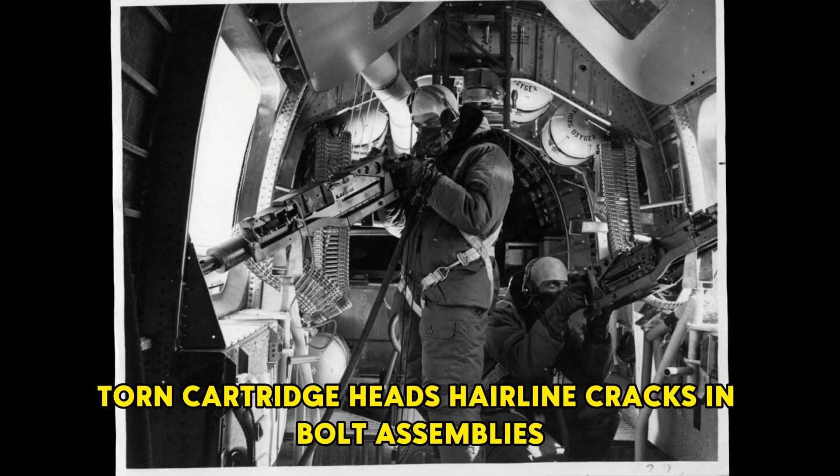Numerous technicians reported similar types of damage: torn cartridge heads, hairline cracks in bolt assemblies, or firing pins striking off-center. One maintenance group noted, "Every 10th barrel change ends with a dead gun." In other words, 1 in 10 guns became permanently silent after barrel replacement.

In the humid climate, with persistent rain and fine sand seeping into every joint of steel, readjusting the headspace, the distance between the bolt face and cartridge case, became torture.

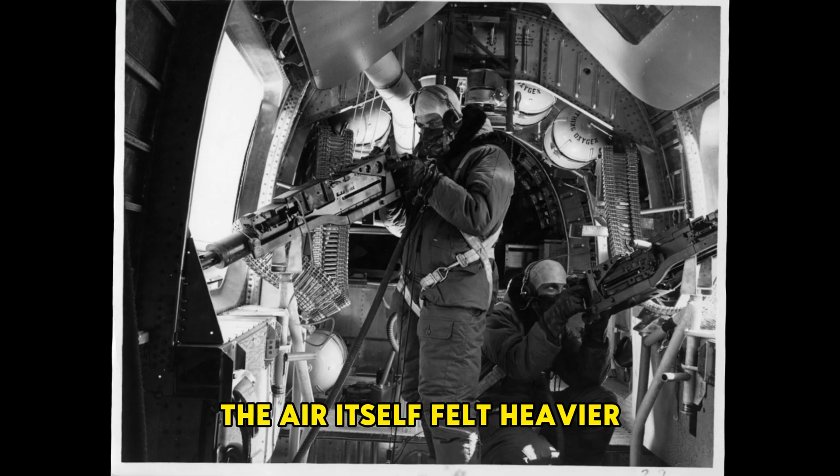A pilot from the 475th Fighter Group recalled years later in an interview with the Smithsonian, "It wasn't fear of the enemy, it was the fear of silence. When you pulled the trigger and nothing happened, the air itself felt heavier." That statement captured precisely what hundreds of men felt as they flew home, powered only by engines and luck.

In a documentary screened in Washington in 1946, the room fell silent as footage showed a P-38 landing with 6 blackened Browning barrels, faint smoke still rising from the seams. The projector hummed softly, and the narrator's voice droned evenly: "They fought with weapons that could not be trusted."

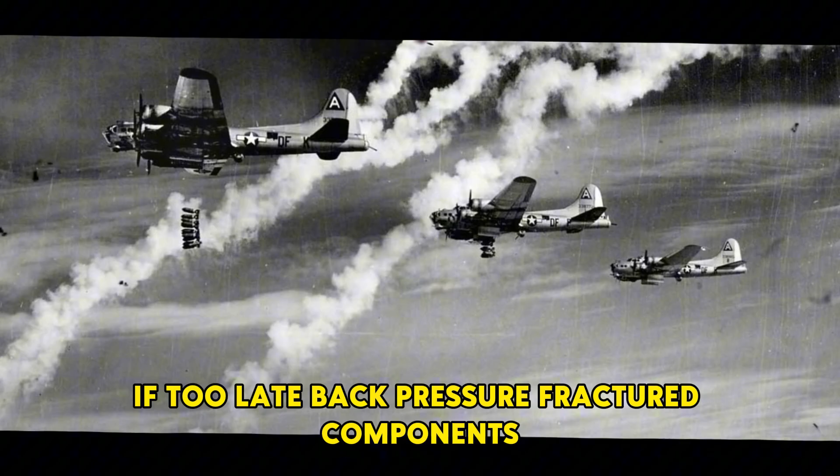According to the USAAF Ordnance Maintenance Review, Pacific Theater 1942, analysis traced the cause to misalignment in headspace and timing, 2 parameters governing the firing cycle. The bolt had to close completely, and the firing pin had to strike the primer within thousandths of a second. If too early, the cartridge exploded before the chamber locked. If too late, back pressure fractured components and halted the next feed.

Units were issued go and no-go gauges for manual adjustment, but the process required a flat surface, stable lighting, and proper tools. In the field, with aircraft still hot from sorties, technicians had to rely on touch. A deviation of less than 0.01 inch could render a gun useless.

In his December 1942 report, Lieutenant Colonel W.H. Morgan of the Army Air Forces wrote, "Field armorers are performing miracles with tools designed for benches, not foxholes." The note was archived as a desperate warning in technical files.

According to Air Force Ordnance Command statistics, the average Browning in the South Pacific reached only 840 rounds before its first jam, lower than training standards.

Some units, in desperation, improvised fixes: regrinding bolts, replacing springs, even shortening firing pins with hacksaws. These methods sometimes saved the next mission but more often destroyed the mechanism after a few hundred rounds. A note in the 11th Fighter Squadron diary read, "We spent more time fixing the guns than flying the planes."

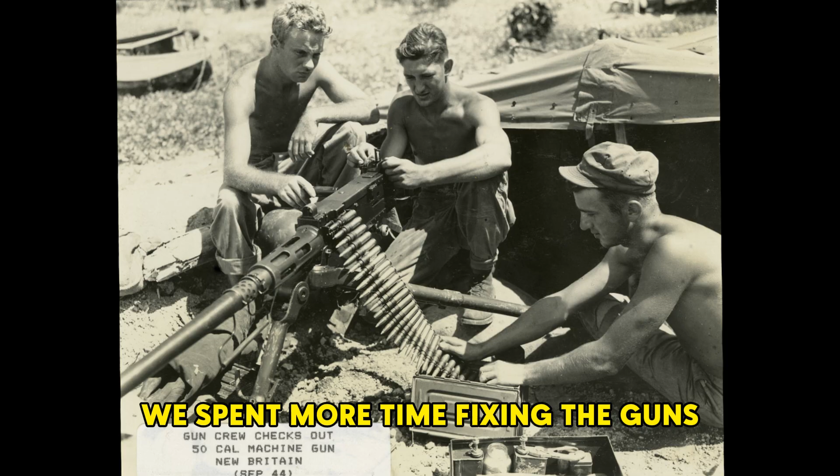To field commanders, the problem was not only technical but moral. The weapon advertised as America's deadliest aerial weapon had become the object of doubt among its own users.

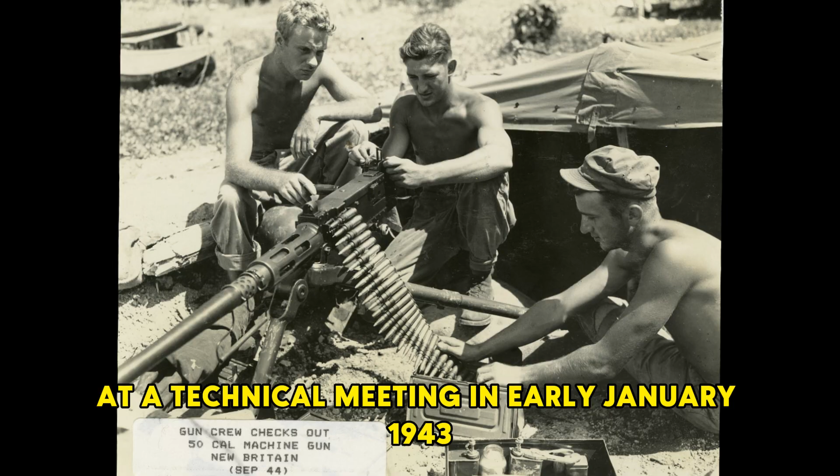At a technical meeting in early January 1943, a young officer spoke in a strained voice: "Sir, it's not the Japanese I fear, it's the trigger." The room fell silent. Everyone understood that in the skies, where a single pull of the trigger decided life or death, the silence of the gun was more terrifying than enemy fire.

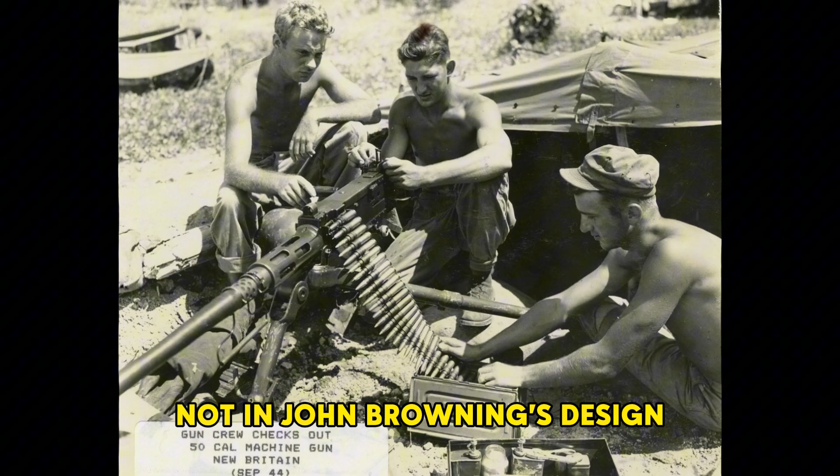According to AAF Technical Memorandum No. 42-117, the conclusion was that the fault lay not in John Browning's design, but in manufacturing precision and maintenance procedure. The system required manual recalibration after every barrel change, but battlefield conditions—vibration, mud, heat, and pressure—made proper adjustment nearly impossible. The mechanism was too delicate to withstand the reality of modern warfare.

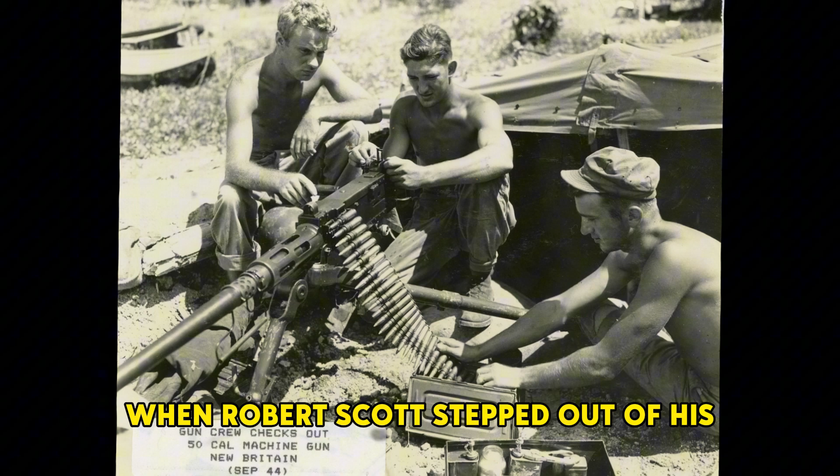When Robert Scott stepped out of his bullet-riddled aircraft that day, he did not know that his incident would become a textbook example in U.S. Air Force technical archives. A photograph captured the moment he stood beside his scorched P-40, gloves still clenched, later reprinted in the following year's report with a terse caption: "Pilot survived. Guns failed." The report's final line contained only four words: headspace and timing errors.

And in the silence of that meeting, no one imagined that just a year later, an engineer at Springfield Armory would change the weapon's fate forever.

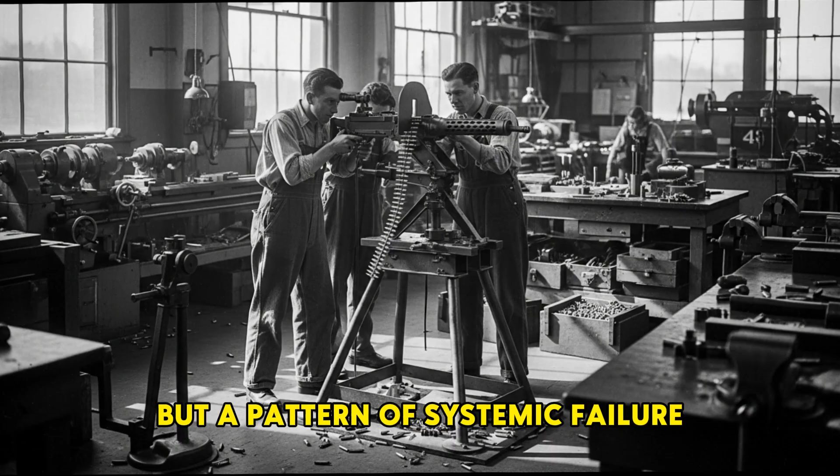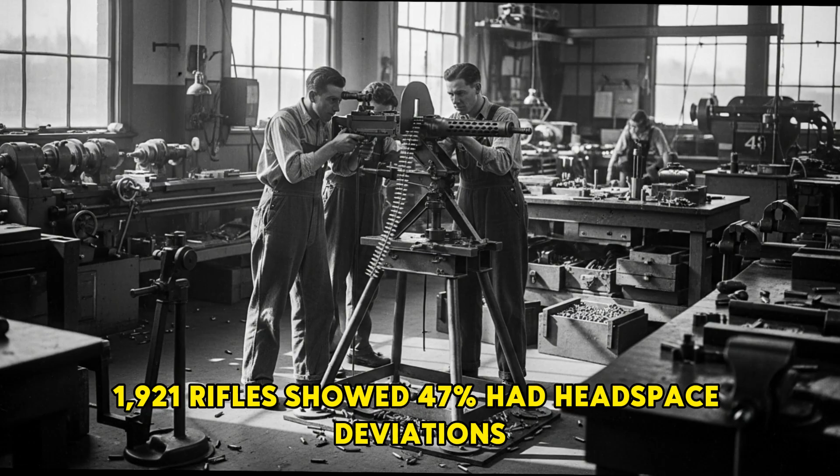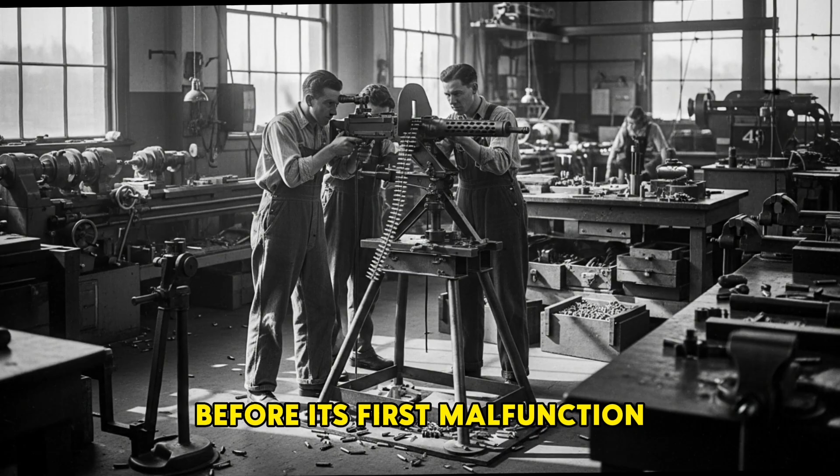Beginning with the numbers, the engineering story that emerges is not a series of isolated faults but a pattern of systemic failure. The 1925 survey of 500 M1921 rifles showed 47% had headspace deviations, 61% had timing errors. On average, each gun functioned for only 840 rounds before its first malfunction, and in 23% of cases, after a barrel change, the weapon could not be fired. These figures are set out plainly in the report and demonstrate that manual adjustment methods were wholly powerless under battlefield conditions. Reading those figures, one must immediately grasp the nature of the problem.

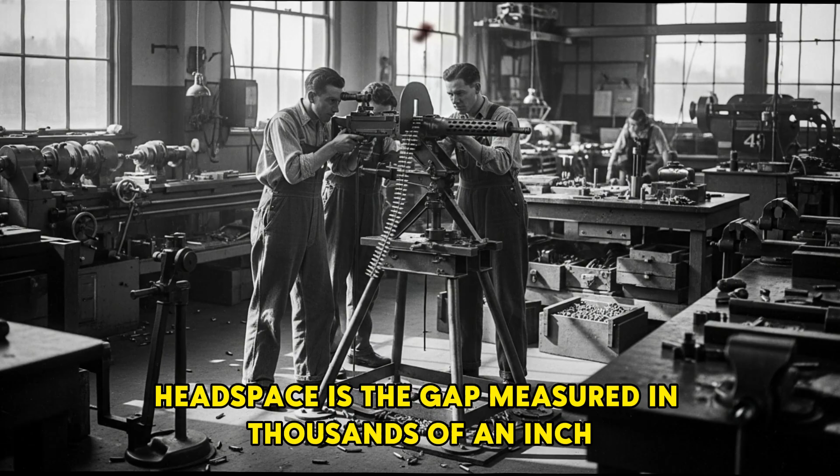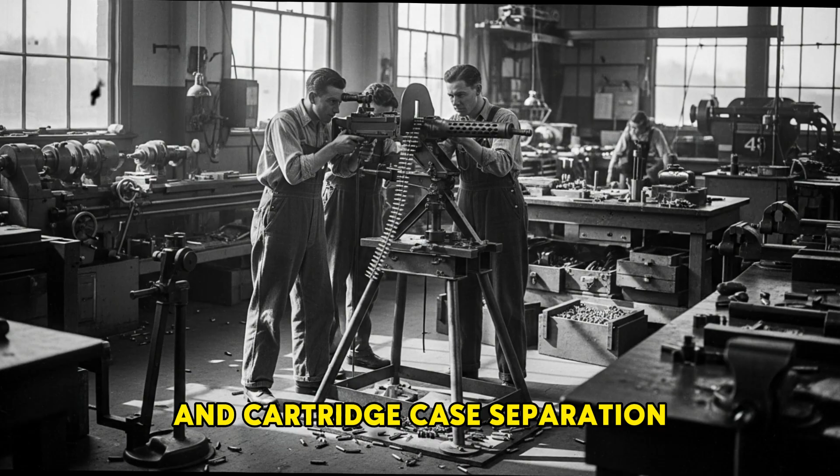Headspace is the gap, measured in thousandths of an inch, between the cartridge rim and the breech face. Timing is the instant the firing pin strikes the cartridge when the bolt is fully locked. Three failure modes repeat across every report: premature cartridge detonation before the bolt is locked, late strikes causing unstable pressure, and cartridge case separation leading to mechanism jams. Each mode arises from mechanical tolerances so small they are invisible to the naked eye.

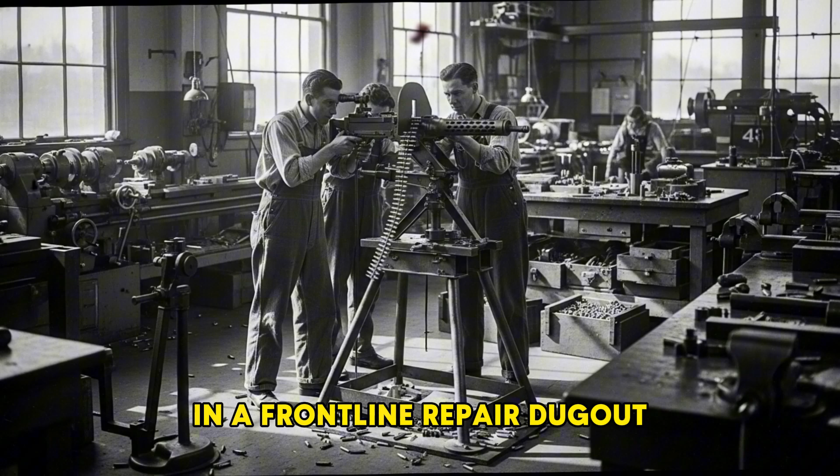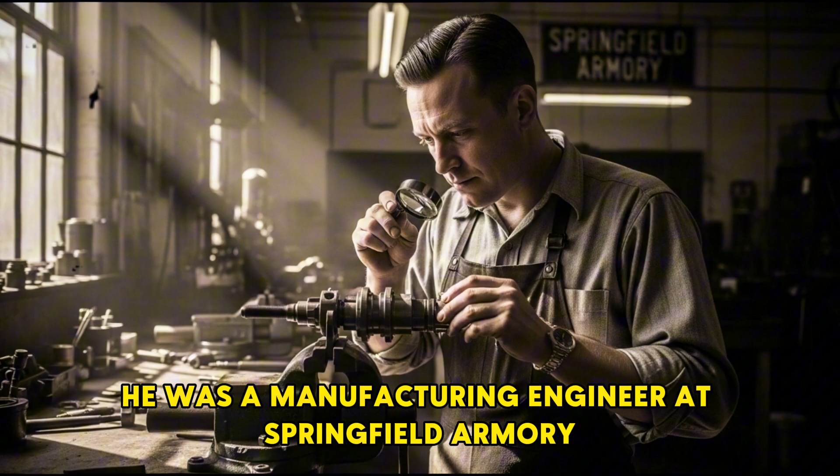In workshop conditions, these errors can be corrected. In a frontline repair dugout, with poor light, tired hands, and sand ingress, there is no way to guarantee workshop-level results. Into that picture steps a man who calmly said, "Precision eliminates adjustment," a phrase not a fashionable slogan, but the thesis of an engineer named Samuel Green. He was a manufacturing engineer at Springfield Armory who saw the difference between a beautiful drawing and a weapon that would survive in the sky.

Green did not argue about the power of individual cartridges. He foregrounded the process: if each part were machined to sufficiently tight tolerances, there would be no reason to rely on the skill of a craftsman under adverse conditions. This notion shifted responsibility from the front lines to the factory, and it directly challenged prevailing production habits.

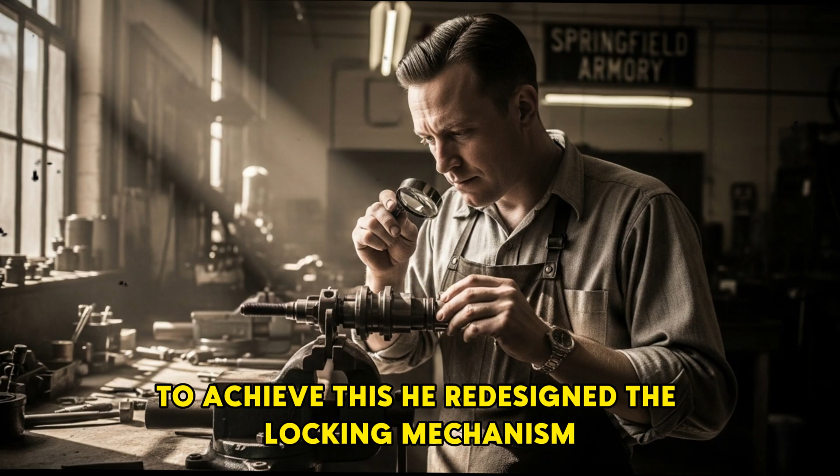His solution was not a novel shape, but a rethinking of the process. Rather than accept that headspace and timing must be adjusted after every barrel change, Green demanded that the factory fix those parameters at the source by machining each component to tolerances about 10 times tighter than the then standard, reaching plus or minus 0.001 inch. To achieve this, he redesigned the locking mechanism, altered machining methods and the inspection regime, and required every critical part to be measured, compared, and test-fitted individually before leaving the plant.

The idea sounds simple, but realizing it required upgrading machinery, inspection procedures, and a will to invest. Some members of the board initially scoffed that producing to such tolerances was impractical. A few contractors said costs would double, and many experts argued it would be difficult to ensure mass-produced parts met the same standard. Green answered with a decisive plan.

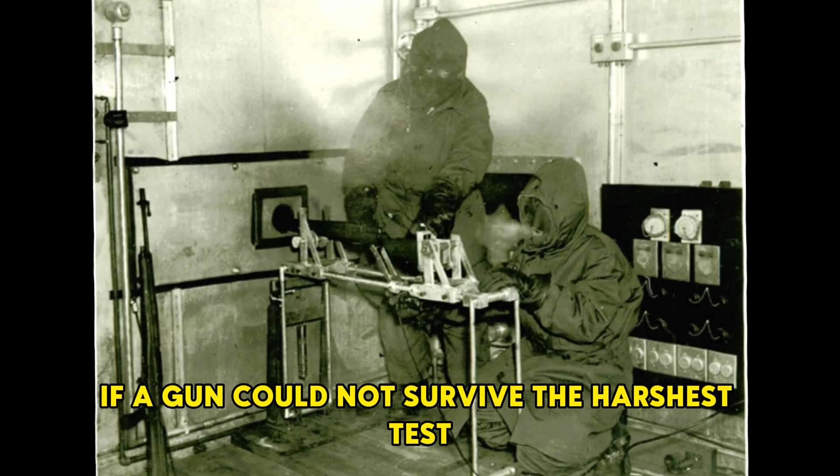If a gun could not survive the harshest test, it did not deserve to go to the soldier. That was the origin of the test later called the suicidal proof.

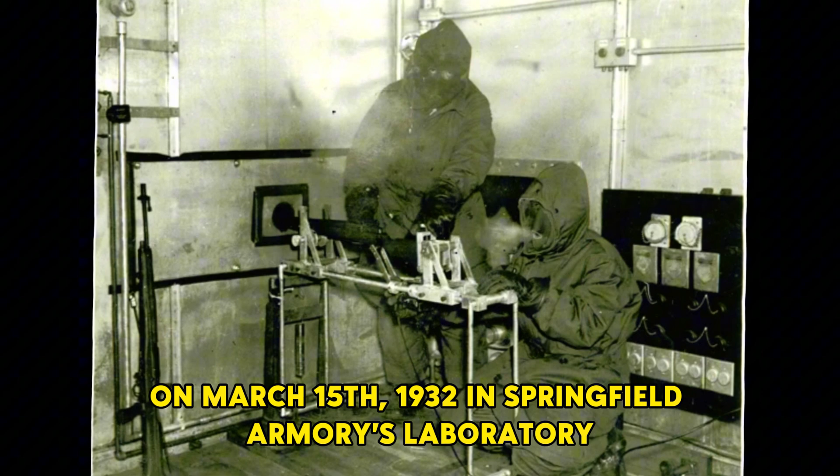On the 15th of March 1932, in Springfield Armory's laboratory, Green loaded the gun with proof cartridges whose propellant had been increased by 30%, producing chamber pressures up to 70,000 pounds per square inch. Each round could blow apart the receiver if a small deviation existed. The danger zone extended to about 20 feet, which is why many called the test reckless.

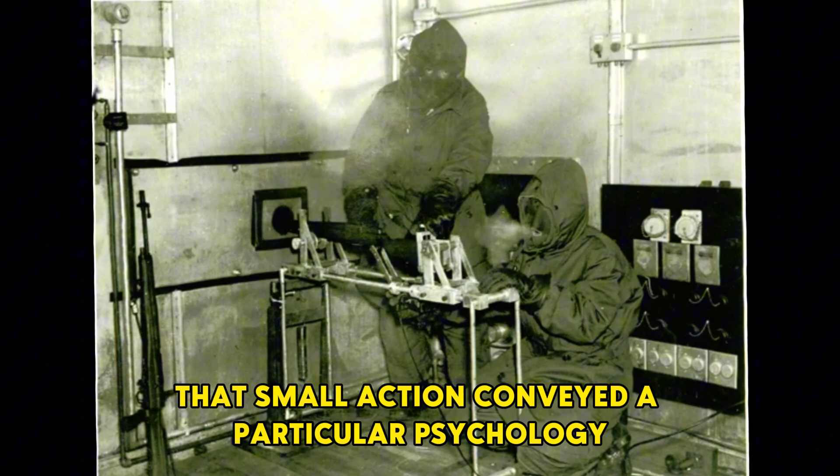He fired 10 proof rounds in succession. The blasts, dust, and fragments followed each shot, and after each one he checked with gauges, removed the bolt, inspected the locking lugs, placed his finger on the metal edge, and felt for heat. That small action conveyed a particular psychology - he was verifying that the machining calculations had held in practice.

The testing did not stop there, because a prototype that survived 10 proof rounds did not prove durability under combat conditions. Green put 6 prototypes into a never-ending stress test cycle, loading them with a total of 50,000 rounds, changing barrels every 5,000 rounds, firing a proof round after every 500 rounds, soaking samples in salt water, coating them with mud, then firing, freezing and thawing to test reactions.

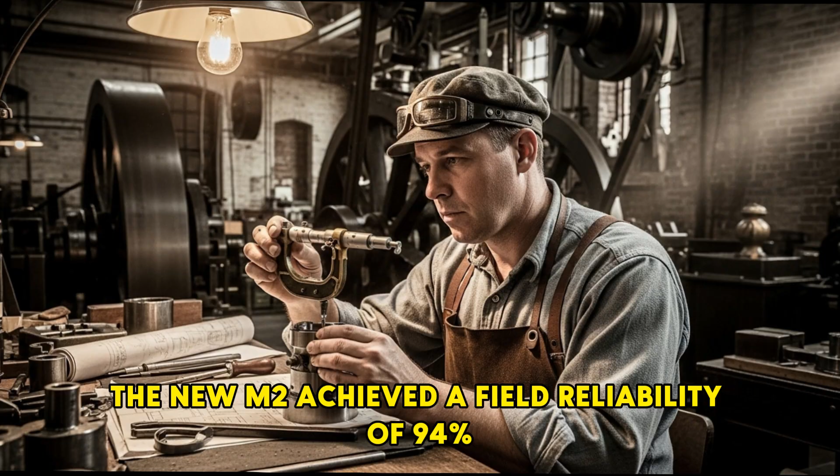Every scenario was simulated. The data were recorded meticulously, inspection results bagged by day, and when the tests concluded, the figure Green presented to the board was clear: the new M2 achieved a field reliability of 94%, compared with the 68% recorded for the M1921.

Measurement tables, notes in black ink, and snippets of recorded commentary from the test assistant after each shift all combined to form irrefutable evidence. But numbers alone were not enough to persuade decision-makers, for cost and scalability remained questions.

Green understood this. He provided the full production documentation, detailing each machining step, and a list of contractors capable of upgrading their equipment. He visited workshops, stood beside machinists, placed his hand on the lathes, sometimes examining a blank with closed eyes, as if testing a musical note.

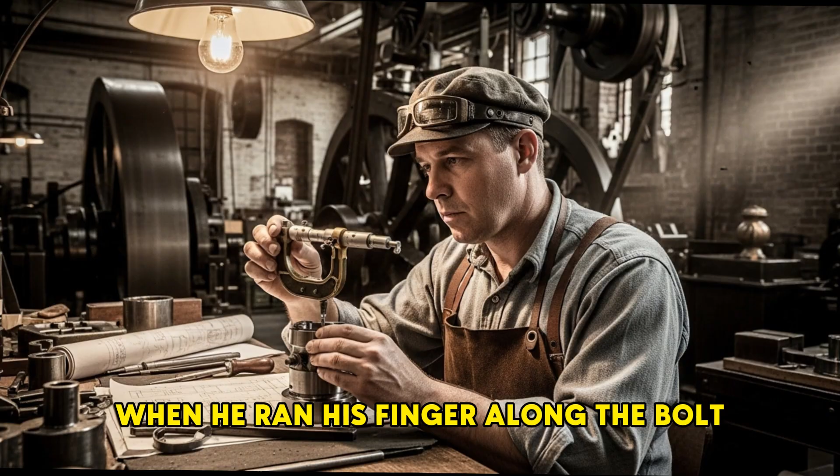An assistant later recalled, when he ran his finger along the bolt, he smiled like a man who found the last piece of a puzzle. That small, specific image softened the dryness of the data.

The outcome of the process was not merely a more durable gun, but a shift in weapons manufacturing thinking, from accepting in-the-field adjustment to emphasizing quality at the source. Green turned a repair problem into a production problem. He converted the pilot's fear of silence into the confidence that when the trigger was pulled, the mechanism would respond, the shot would follow - and that was the difference between life and death over the sky.

On the 8th of April 1932, inside the meeting room of the Army Ordnance Board in Washington, the air was thick with the smell of old paper and cigarette smoke. 20 leather chairs were arranged in a circle around a dark wooden table, on which lay a stack of documents over 200 pages thick - the submission by Samuel Green, containing tolerance charts, stress test results, and photographs of two prototypes that had withstood 70,000 pounds per square inch pressure levels. Sunlight filtered through a narrow window, cutting through the haze like mist in a factory.

In that room, a decision was about to be made that would shape the history of American weaponry. A total of 12 senior ordnance officers and engineers attended, representing different divisions: procurement, logistics, cost control, and tactical design. From the start, the atmosphere was tense.

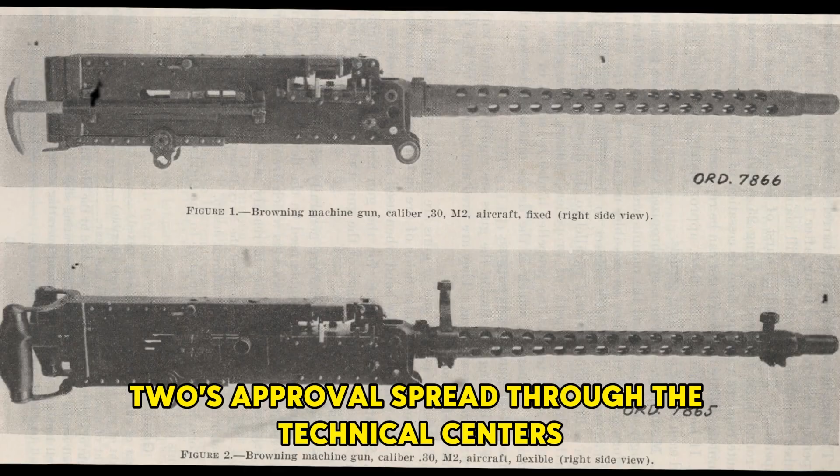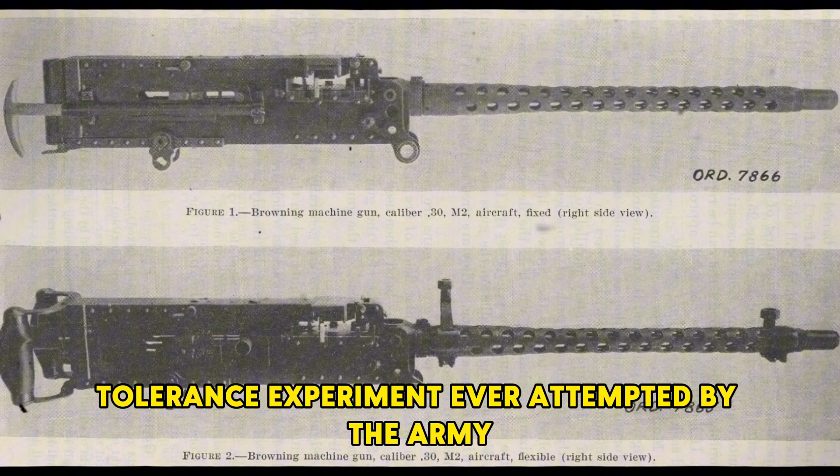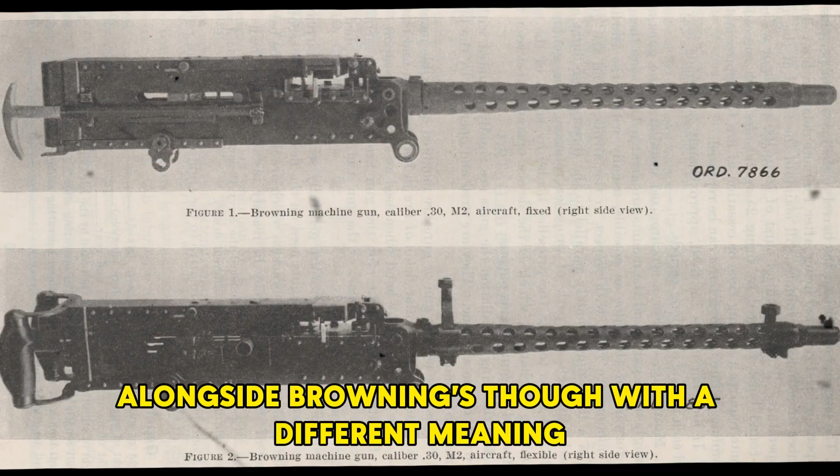That remark was later recorded in his memoirs, his entire professional philosophy distilled into a single sentence. In the following days, news of the M2's approval spread through the technical centers. Factories in New Haven, Chicago, and Detroit received orders to prepare for production line conversion. Industrial journals called it the most ambitious tolerance experiment ever attempted by the Army. Within engineering circles, the name Samuel Green began to be mentioned alongside Browning's, though with a different meaning. Browning was the creator. Green was the guarantor of survival.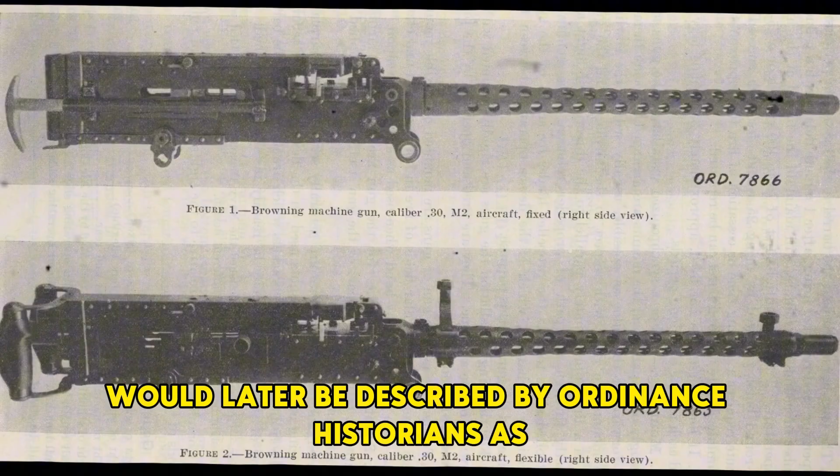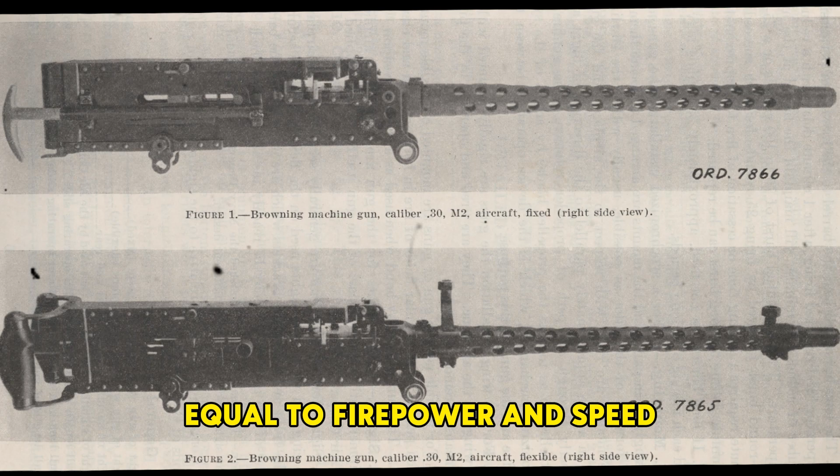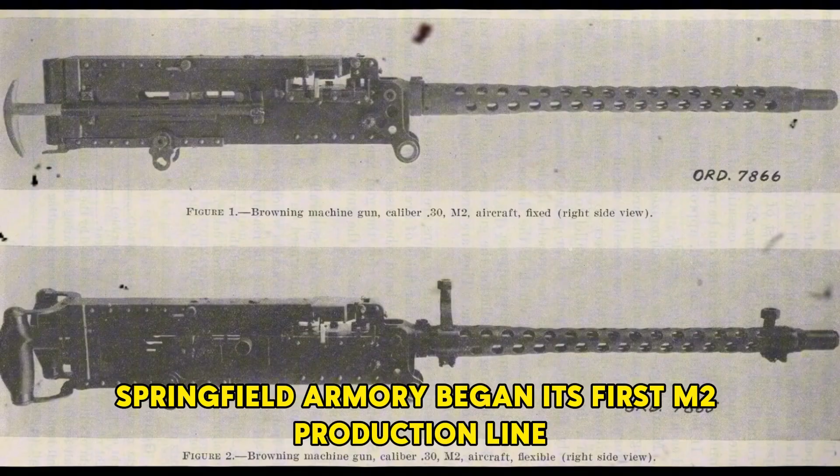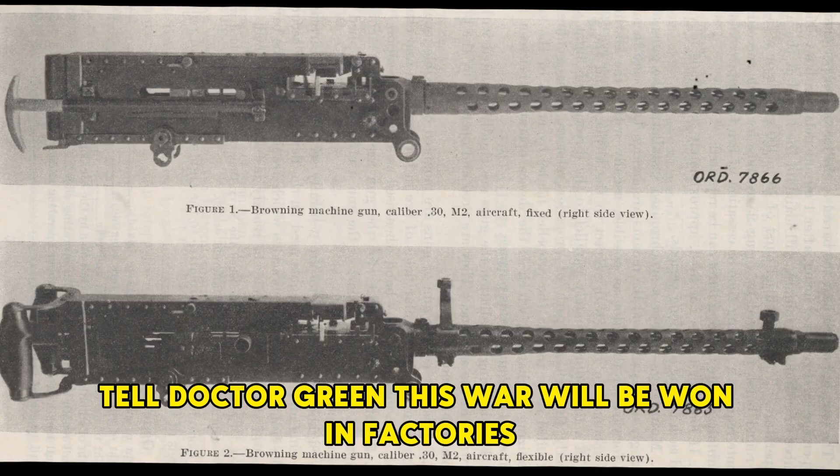The 8th of April 1932 meeting would later be described by ordnance historians as the Day of Precision. It marked the first time in U.S. history that manufacturing tolerance was recognized as a strategic factor equal to firepower and speed. According to an internal Ordnance Department report, within 6 months of that decision, Springfield Armory began its first M2 production line under Green's direct supervision. Archival notes recorded that after MacArthur left the room, he paused at the door and quietly told an aide, 'Tell Dr. Green this war will be won in factories before it's fought in the skies.'

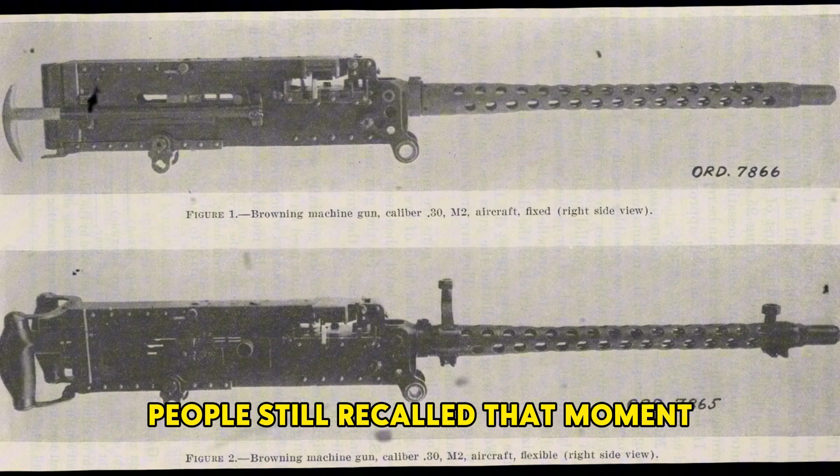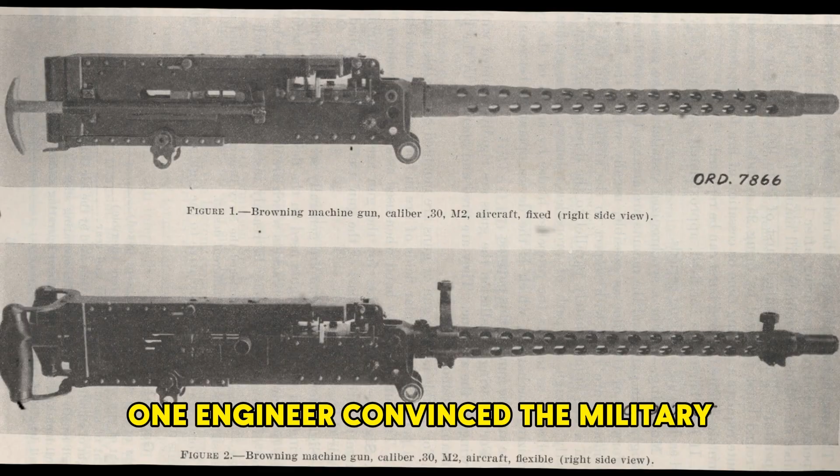When the story of that meeting was retold years later, people still recalled that moment as a turning point in their thoughts. In the smoke-filled room of April 1932, amid calculations and budget arguments, one engineer convinced the military that precision was not a minor detail of production, but the backbone of victory. And in that silence, history turned its gear forward.

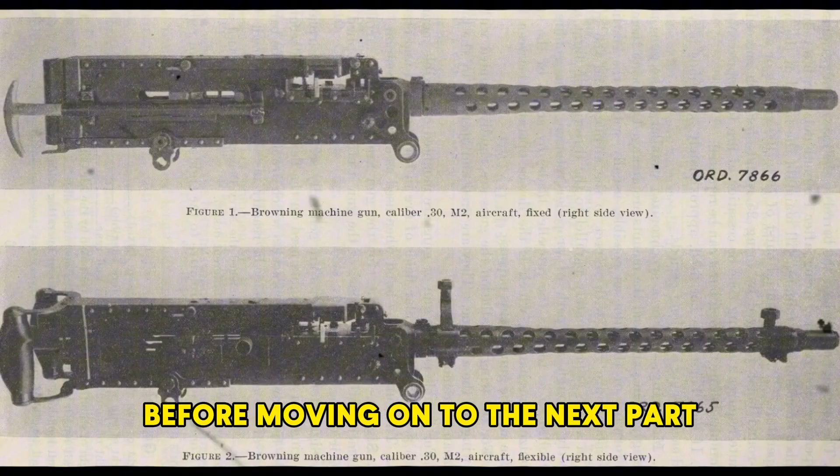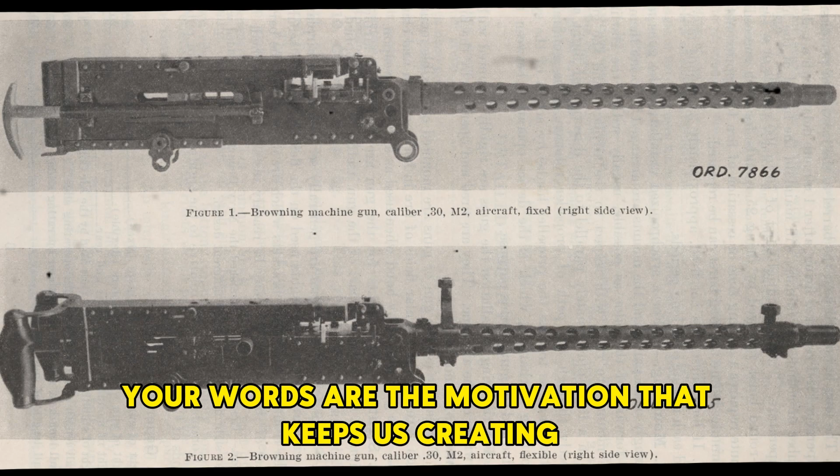In December 1933, the first M2S left the production line at Springfield Armory, carrying a large question: could an idea of ultra-tight tolerances be turned into a mass-produced product or not?

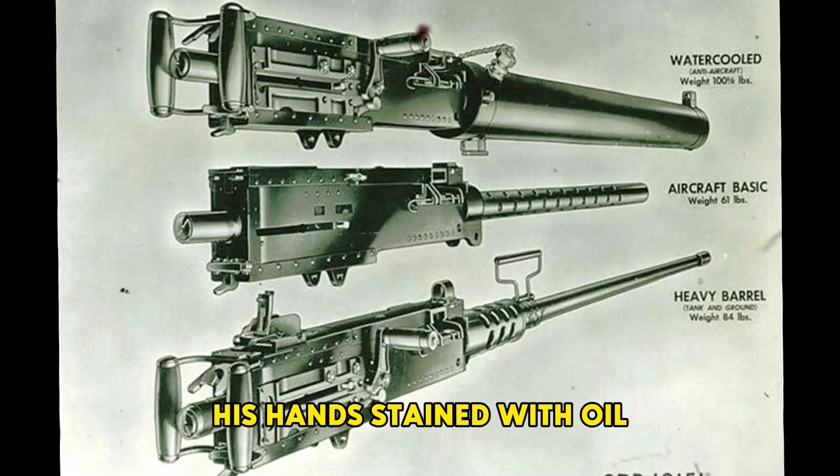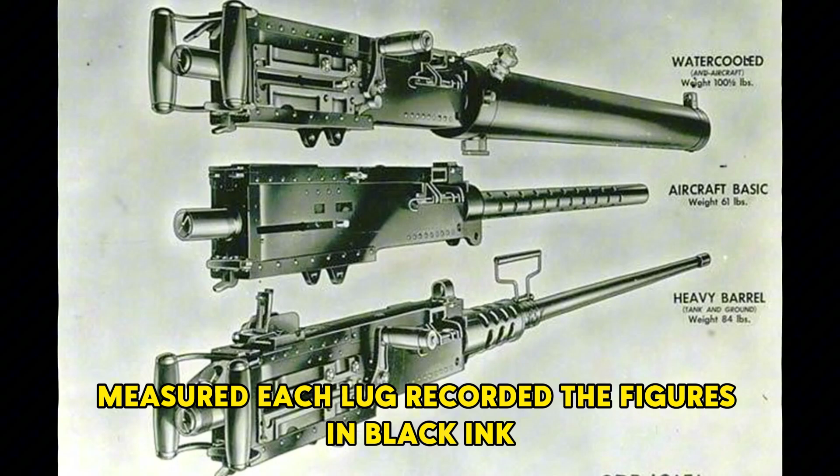Samuel Green stood at the edge of the shop, his hands stained with oil, his eyes fixed on each component as workers set them on the inspection table. He opened the inspection box, measured each lug, recorded the figures in black ink, then stepped back to observe the whole, the repeated action taking on the character of a ritual.

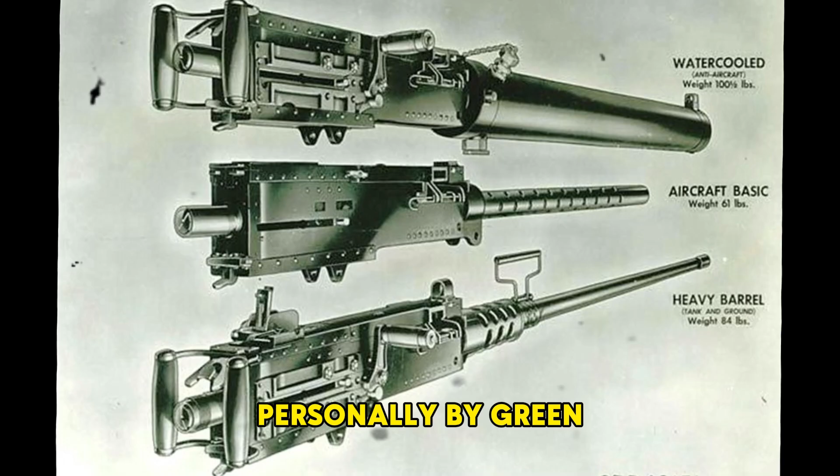The first guns, in the initial batch, were all accepted personally by Green. Each critical dimension was checked before the guns were boxed for shipment.

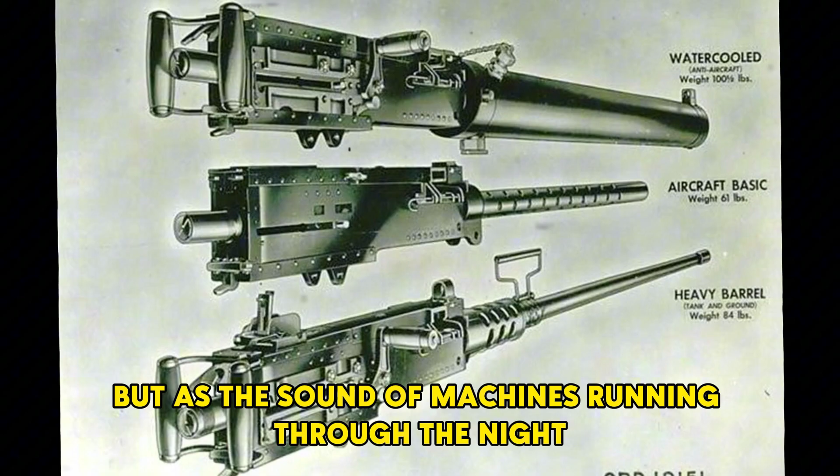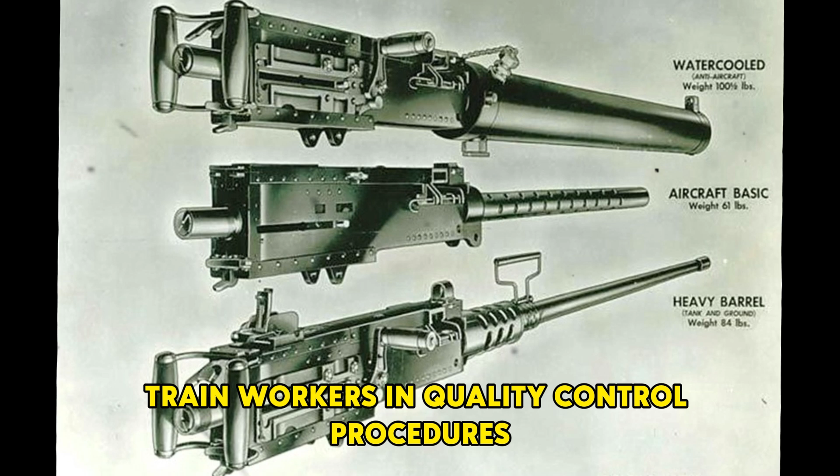The industrial impact did not arrive as a proclamation, but as the sound of machines running through the night. Manufacturing plants in New Haven, Chicago, and Detroit had to buy new lathes, install micrometers, train workers in quality control procedures, and standardize every recorded step.

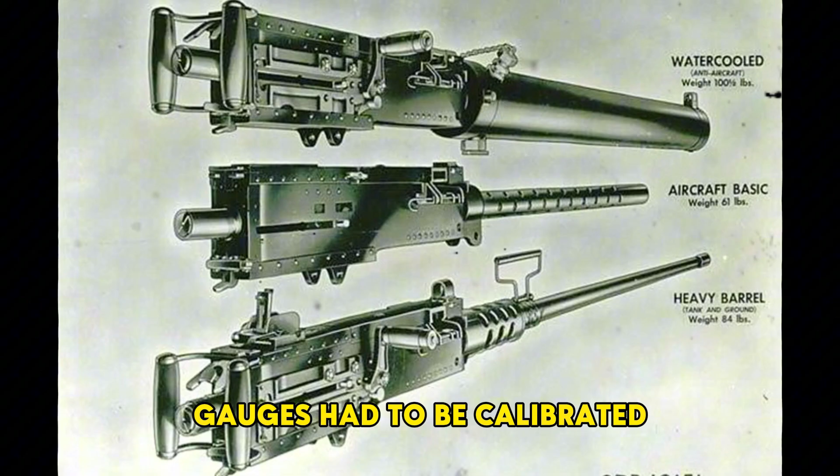Maintaining tolerances at ultra-small levels was not a one-person task. It became a systems problem. Gauges had to be calibrated, the shop environment had to be controlled, and the inspection process had to be institutionalized.

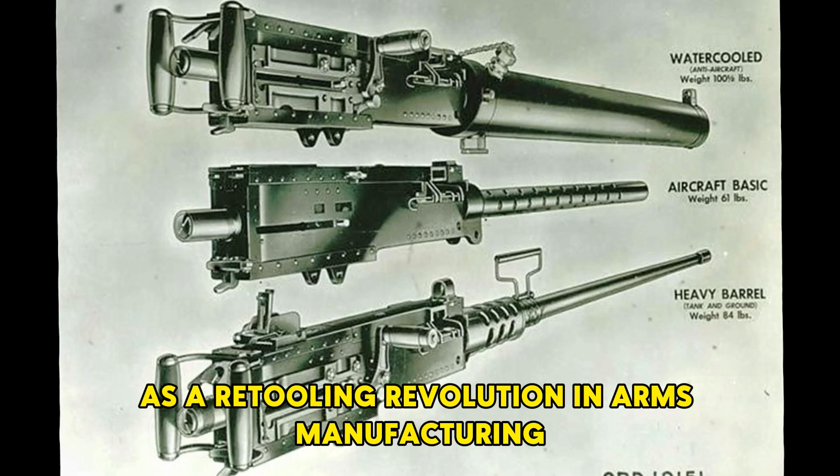Technical journals described this phase as a retooling revolution in arms manufacturing because it forced the entire industry to change how it thought about productivity and quality at the same time. The change came at a cost, but the value proved itself sooner than many expected.

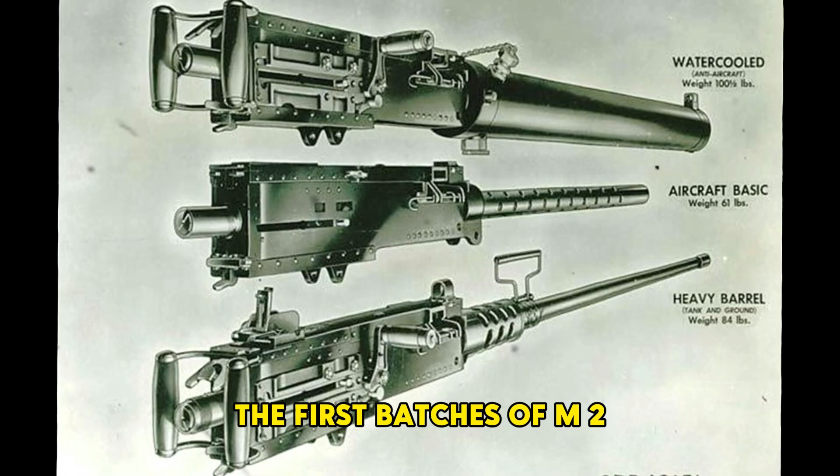The first batches of M2S were sent to frontline trials, partly sent to China during the 1937 Sino-Japanese War, where pilots and maintenance crews tested them under harsh conditions.

Reported results from units that received the shipments indicated 63 aerial victories were recorded by aircraft fitted with M2. Only 2 failures were reported, and the causes in both cases were combat damage rather than intrinsic mechanical faults. Those figures appeared in reports sent back to Springfield as practical confirmation that the changes in the plants had translated into performance in the air.

Bringing a prototype into mass production was not only a technical matter, but also a test of managerial capability. Green and his team had to draft step-by-step assembly procedures, from machining to final inspection, specifying who performed each operation and who certified it.

Subcontracting factories, pressured to change, reacted initially with reluctance and then with technical seminars, engineers standing beside engineers, passing drawings, adjusting machines, trying cutting tools.

A foreman later recalled, 'We rewired our plant like a heart getting a new valve, painful then necessary.' The remark is plain but accurate. It reflects upgrading the supply chain to meet the new standard.

In the factory, people began keeping quality logs. Each part was coded, each dimension was marked, and every production lot was sampled at random. Only parts that exceeded the standard were allowed to proceed to assembly. The rest had to be reworked or scrapped.

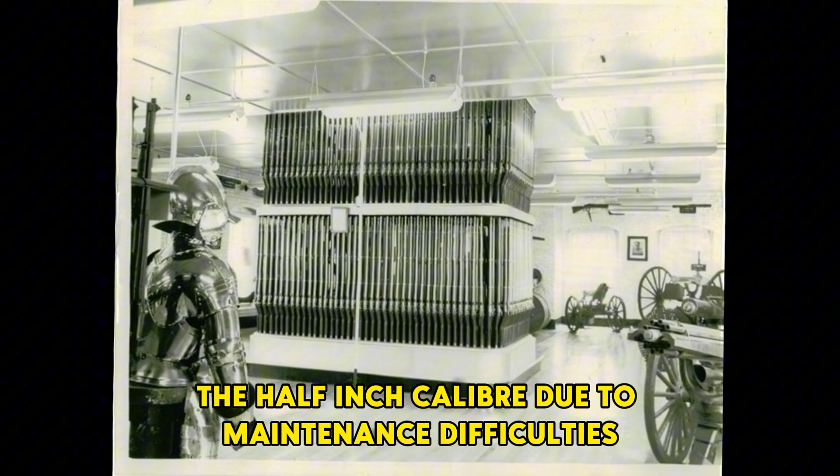At the strategic level, the M2's attainment of combat production standards meant the military no longer had to consider abandoning the half-inch caliber due to maintenance difficulties. Instead, it became clear that investment in production lines and quality control could pay dividends in aerial advantage.

The complete replacement of the M1921 by the M2 in mid-1938 was practical proof of this, after which the gun became the standard weapon for the US Army Air Corps, Navy, and coastal defense.

This conversion signaled a different approach to modern war, in which industry is a direct extension of the battlefield.

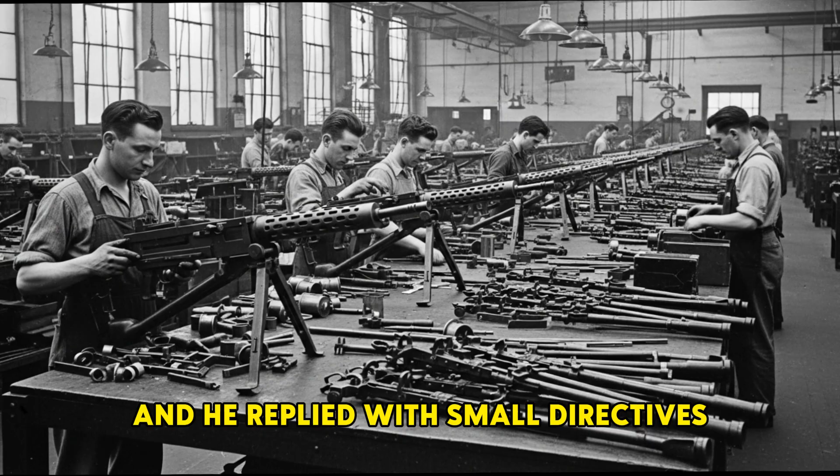In the plants, Green monitored every production report. He received letters from subcontract managers with charts. He read failure descriptions like one reads a diary, and he replied with small directives, adjusting cutting tools, changing assembly sequences.

A technician wrote in his memoir that the first time he saw Green smile was when a small batch passed inspection perfectly. He smiled like a man who had taught a reluctant student to understand music, the worker recalled. That small image, a smile amid a plant of smoke and oil, was a sign that the idea of tight tolerances could become reality.

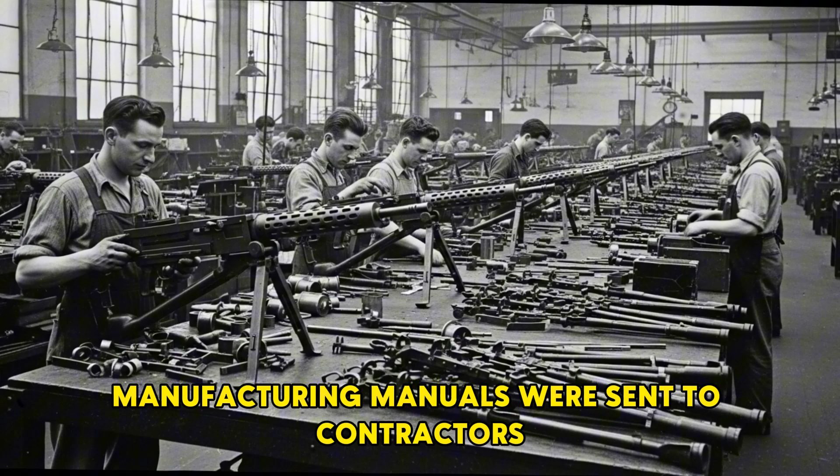Records in the Springfield archives show that within a few years, the M2 production process was standardized, manufacturing manuals were sent to contractors, and quality standards became an inseparable part of contracts. Workers were paid premiums for precision work, machinery was maintained on schedule, and testing laboratories became permanent departments rather than ad hoc presences for troubleshooting.

This process laid the foundation for a new capability. When war came on a large scale, America could transform its industrial capacity to produce highly reliable weapons, something previously thought unlikely. It can be said that success in the industrial proof phase did not merely rescue a gun from systemic failure. It demonstrated an important principle for the engineering age.

If you want weapons reliable on the battlefield, start by manufacturing them correctly at the plant. At the end of this phase, the M2 had shown that Green's theory was not merely a slogan, but the new standard for modern arms production.

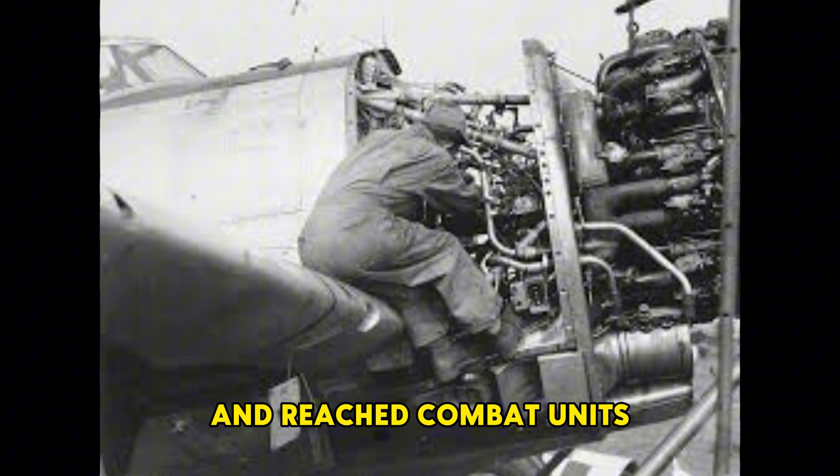When the M2S left the assembly lines and reached combat units, the question was no longer theoretical. It became a test written in steel and fire across the sky, every engagement a measure of reliability. Compiled field reports show that between

1942 and 1945, over 2 billion M2 rounds were fired across global campaigns, with an average malfunction rate of only 1.8 per 10,000 rounds, a gun replacement rate due to wear of about 4.2% per year, and a recorded field reliability of 96.3%. These numbers were not propaganda. They came from workshop logs, mobile reports, and mission records printed in red ink, turning a factory concept into a living truth on the battlefield.

To grasp the meaning of those numbers, one must look at the moments when pilots faced their enemies head-on. The case of Lieutenant Whitaker in Java, 1942, was a plain but decisive demonstration of performance. He fired a total of 2,400 rounds in a single engagement, scored 3 kills, and reported 0 malfunctions in his M2 system aboard the P-40. His tactical report was accompanied by a narrative describing how the synchronized streams of bullets shredded the enemy aircraft.

Years later, amid the smoke over Normandy, Captain Robert Johnson returned to base after a prolonged battle. Reports vary between 2,400 and 4,800 rounds fired. His aircraft bore 225 bullet holes, yet the M2S kept firing, bringing his P-47 home and providing living proof that M2 durability translated directly into survival.

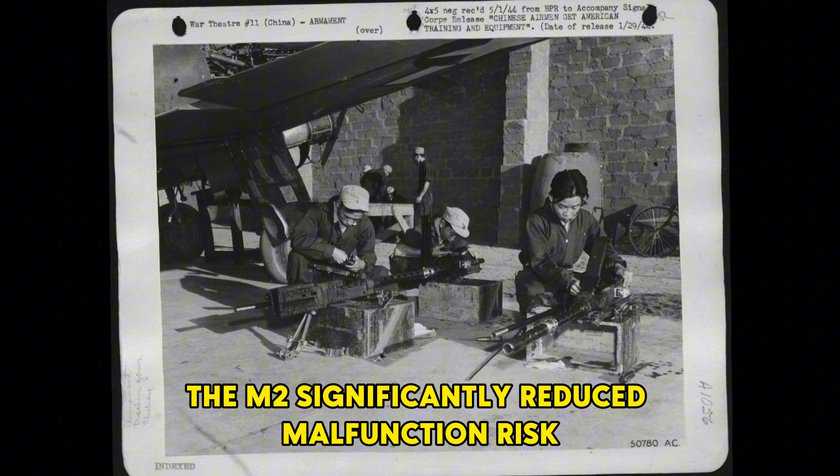Some critics argued that rounds per victory data might be skewed by situational differences, but even allowing for statistical variance, the trend was clear. The M2 significantly reduced malfunction risk, reflected in bomber return rates and fighter loss reports.

In the context of modern warfare, the M2 became a design lesson. A reliable weapon could win not merely through power, but by forming a dependable combat system enabling units to coordinate, trust, and act decisively. The figures 1.8 per 10,000, 4.2%, and 96.3% were more than data points.

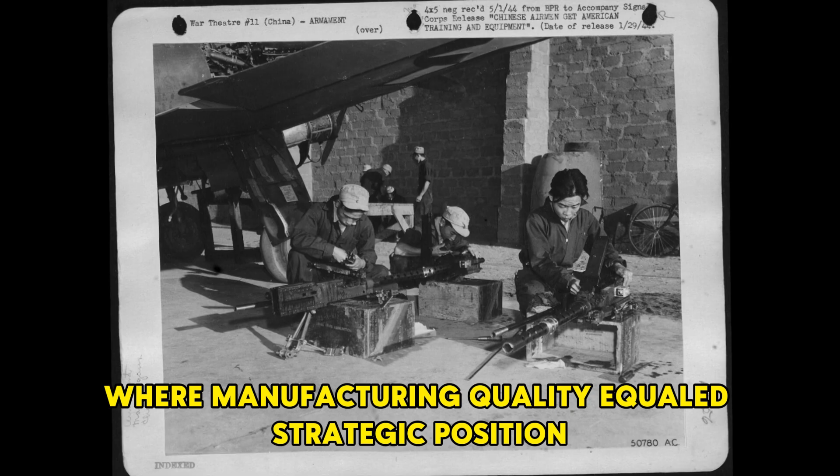They embodied a new perception where industrial precision became tactical superiority, where manufacturing quality equaled strategic position, and where the silence of a trigger was no longer terror but rarity. And in that quiet, pilots could aim, fire, and come home.

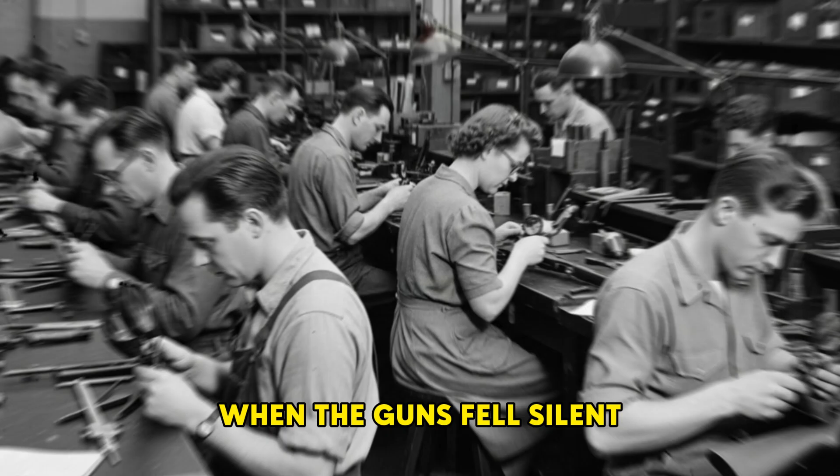When the guns fell silent, the question that remained was what had survived alongside history. From 1933 to 1945, the Browning M2 evolved from a doubtful prototype into an enduring symbol of mechanized war.

When the world's cannons stopped, Springfield Armory's production lines did not, because the Army realized that what had been created was not merely a weapon, but a standard of engineering.

According to the U.S. Ordnance Final War Production Summary, 1946, over 2 million M2s had been produced, with total combat ammunition fired exceeding 2.3 billion rounds, enough bullets, if laid end to end, to circle the Earth 3 times.

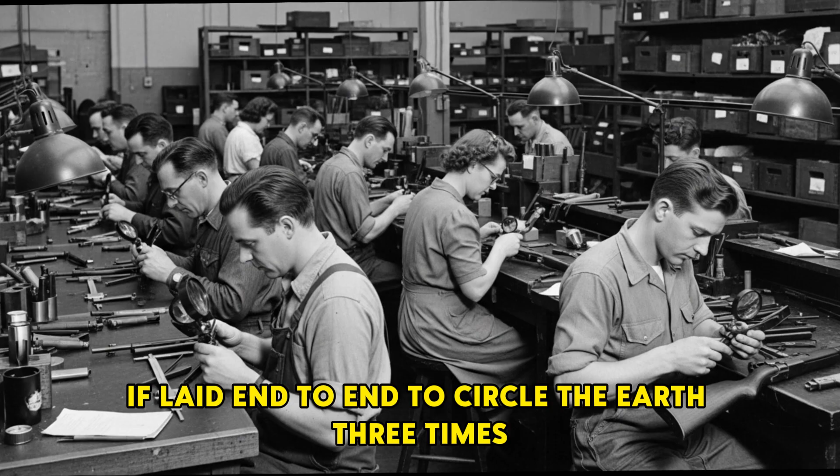Those guns had appeared on every battlefield, from Normandy to Okinawa, and after the war, they continued to serve in over 100 countries, mounted on armored vehicles, ships, aircraft, helicopters, and even field defense stations.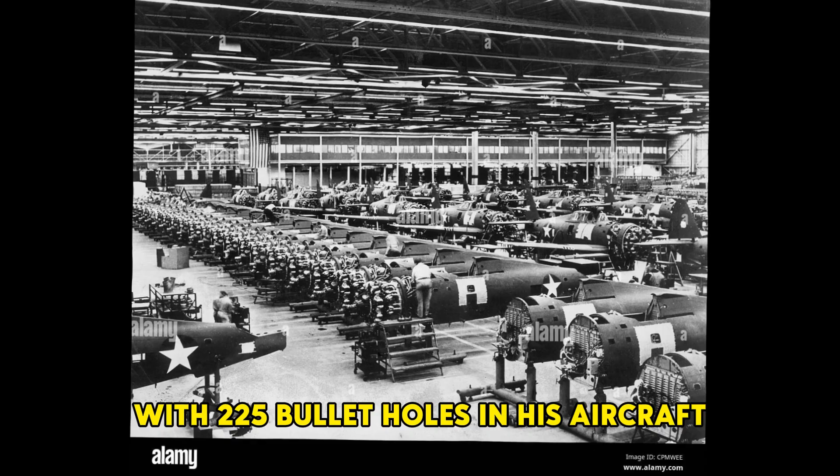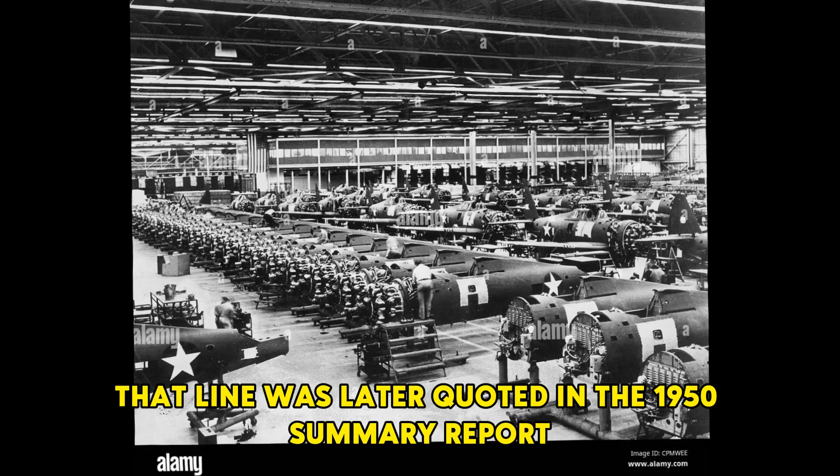In a 1947 Army Air Force's post-war seminar, Colonel Robert Johnson, the man who survived with 225 bullet holes in his aircraft, told young cadets, 'What saved me was not courage, it was a machine that refused to quit.' That line was later quoted in the 1950 summary report as evidence of the value of manufacturing precision.

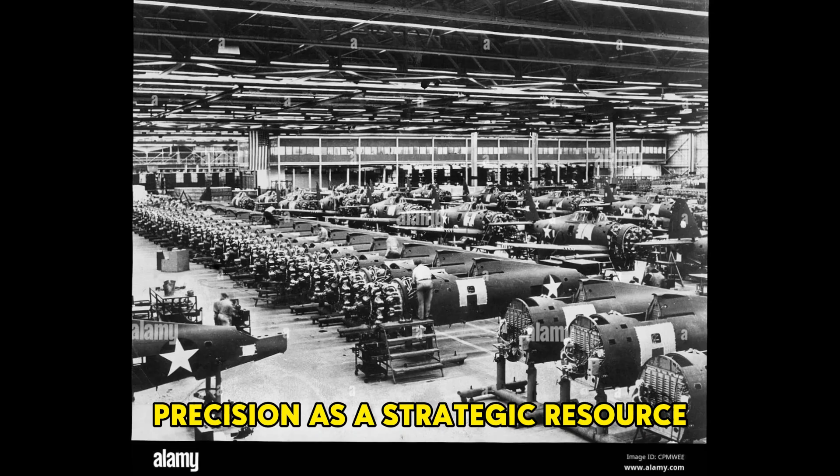For the industry, the M2 became a classic case study of manufacturing precision as a strategic resource. As the war expanded, the United States did not win through newer weapons, but through assembly lines capable of producing weapons that worked consistently.

In an MIT manufacturing textbook from 1948, the phrase 'Tolerance can win wars' was used as the title of the opening chapter on strategic mechanical engineering, with Samuel Green's name cited as proof that machining discipline could shape the battlefield. His story spread beyond the military, becoming a reference point for aviation, medicine, and automation throughout the next century.

Green did not merely change a weapon, he changed the mindset of engineering responsibility. In a handwritten note preserved in the Springfield archives, he wrote, 'Machines are honest, they only fail when men build them carelessly.' A short sentence, yet one that encapsulated his philosophy. Every small deviation in manufacturing equaled a fragment of mortal risk on the battlefield.

Addressing a group of young engineers in 1944, he once said, 'You can save a pilot by 1,000th of an inch.' That statement was later engraved on a bronze plaque in the Springfield Armory Memorial Hall as a declaration of engineering ethics. Green's post-war life was quiet.

He continued working at Springfield until 1953, retiring at the age of 62. At his farewell, there were no cameras, no reporters, only old machinists lining the hallway, presenting him with a small metal block engraved ±0.001 inch, 'We remember.'

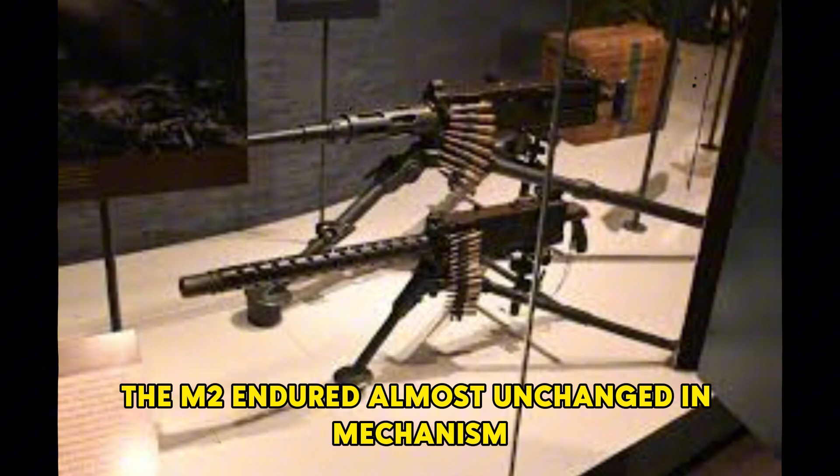At a strategic level, the M2 lesson stood as evidence of concentrated industrial power. As the US entered the Cold War, the M2 continued to serve in Korea, Vietnam, the Middle East, Afghanistan, and countless other fronts. Though new guns emerged, the M2 endured, almost unchanged in mechanism, having reached an optimal balance between power and reliability. Analysts called it the immortal machine gun. Today, more than 90 years after Green's proof test, the M2 remains in service across every branch of the US military, with modern M2A1 variants still using the same bolt system he designed.

In reflection, what set Green's legacy apart was not the longevity of a single weapon, but the shift in how the world understood the relationship between engineering and ethics. In war, the two are often seen as opposites, technology on one side, humanity on the other. Green united them in a simple equation: precision is the highest form of compassion, because to prevent error is to prevent death. In his words, doing it right to the thousandth was the most practical way to save lives.

That legacy still resonates in engineering schools and defense industries. When M2s on Humvees in Iraq or on helicopters in Afghanistan fire their rounds, that sound carries the echo of the man who spent half his life calculating to the thousandth of an inch. In modern factories, every time an engineer tightens a screw and rechecks a tolerance, they continue a tradition born in a small Springfield room in 1932, where one man chose to trust precision over chance.

When asked in an interview near the end of his life how he wished to be remembered, Green replied, 'If they remember me at all, I hope they remember that we did our job right.' Simple, brief, yet enough to summarize a century of engineering and ethics. His silence became an extension of the M2 itself, steady, resolute, and enduring, like the echo of its gunfire across old battlefields, reminding the world that precision is not a technical detail, but a human legacy for life.